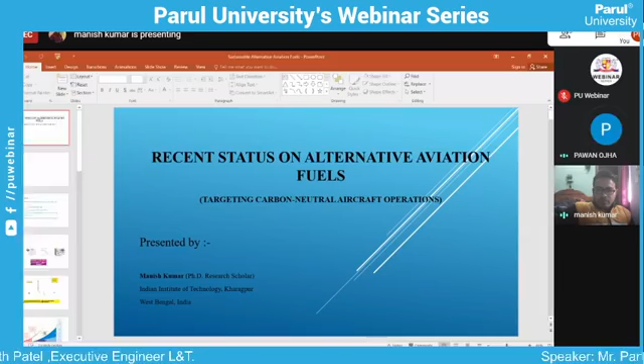He graduated in the year 2013 in Aeronautical Engineering from Hindustan Institute of Technology and Science. Then he pursued his master in Space Engineering and Rocketry from Birla Institute of Technology, Mesra. And after that, he worked as an assistant professor in the Department of Aeronautical Engineering, Priyadarshini College of Engineering, from 2015 to 17. And then later on, he joined as a junior research fellow in Department of Aerospace Engineering, IIT Kharagpur.

Then he worked as a junior research fellow for 1 year on the research topic combustion characteristics of alternative jet fuel. And then he got inducted into the PhD program in the year 2018, and now he is pursuing his PhD in the same domain. He has around 6 to 7 publications in his name, in international journals and conferences.

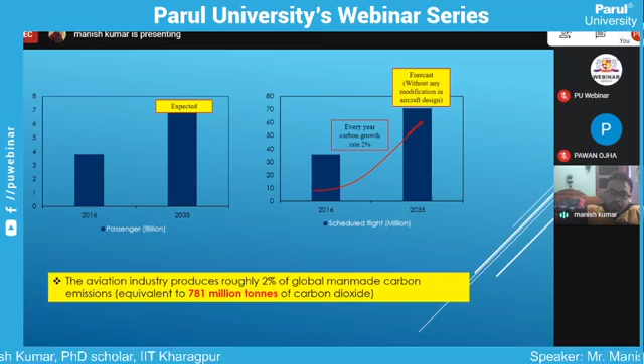Here you can see that every year the aviation industry almost contributes 781 million tons of carbon dioxide to the environment.

We now have this improved aerodynamical structure. Because of that, we have seen a lot of differences in emissions, and these differences are due to new kinds of technology.

So after that, by employing different potential alternative fuels, we can go to 0% carbon, meaning a carbon neutral kind of thing. For that, we have to think of new fuel or modify the existing fuel, and proceed in that way. So by 2050 we can reach carbon neutrality.

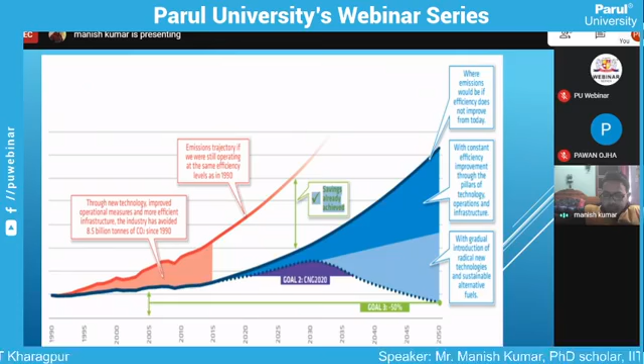Whenever any industry talks about alternative fuel, they generally come to biofuel. But biofuel is not 100% the solution, because in biofuel there are things like palm oil which will cause deforestation.

So it's not a good thing to directly say biofuel, because in many magazines, whenever we talk about alternative aviation fuel, biofuel comes into the picture. We should instead say sustainable alternative fuel — that term is better.

So whatever alternative fuel has potential and cannot destroy our environment, or can be sustainable and feasible for the present aviation industry and usable in our present aircraft, that's the terminology we should stick to.

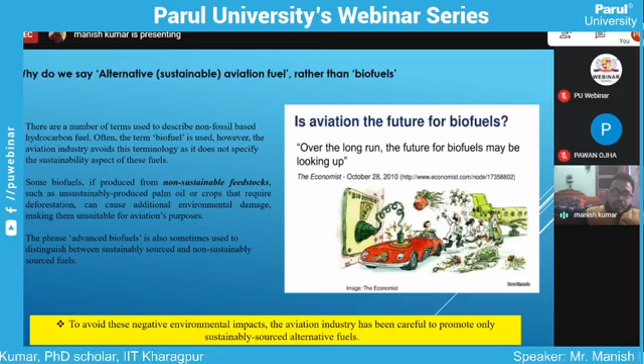Right now, the alternative fuels we prepare are the third generation of fuel, made by green algae, Jatropha — these are feedstocks of the biofuels. Also solid waste can be used, along with Jatropha, camelina, yeast, and salicornia.

Nowadays used cooking oil has also come into the picture. We can go for biodiesel kind of things, which can be extracted as biodiesel and used in the aviation industry.

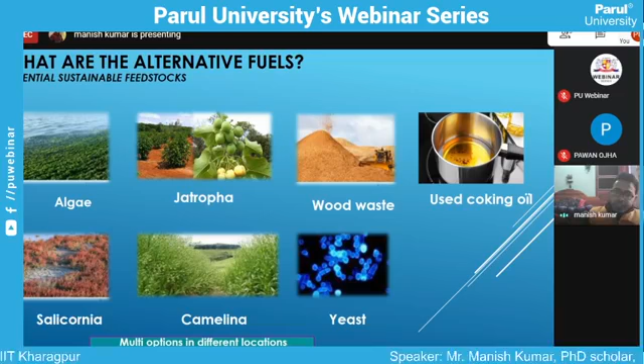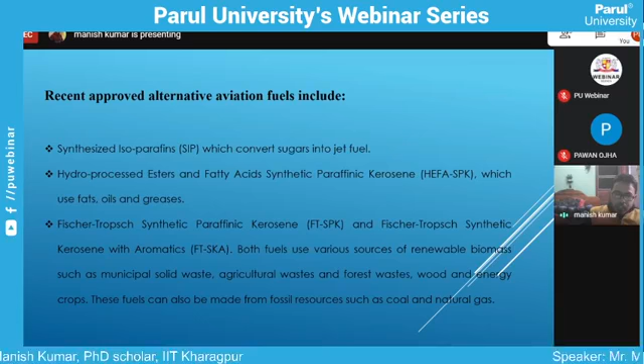Nowadays, recent approved alternative fuels are widely used in many countries, like synthesized isoparaffin, hydroprocessed ester and fatty acid synthetic paraffin, called HEFA SPK, and FT SPK, which is Fischer-Tropsch synthetic paraffin kerosene. These fuels are globally used and certified.

Generally, from the feedstock we use, we take this feedstock to the industry and process it. These processors allow us to process it and use it as an alternative fuel.

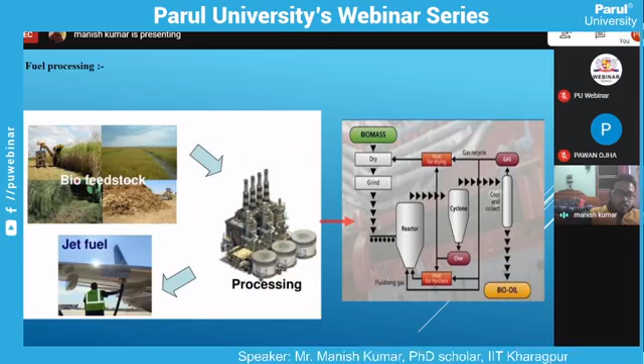So the thing is, we are not impacting the environment. Second, no country needs to depend on any other country. They can do their own agreements, grow these feedstocks on their own land, and get proper alternative fuel to use. This way, the country will not depend on other countries. These are the benefits of alternative fuel.

There are some key advantages, as we discussed - environmental benefits. In most of the biofuels we have tested, we have seen around 80% reduction in CO2 emission. Even some biofuels we tested in our lab found quite better results, which we will discuss later. There's also diversification of supply and economic growth.

If we move to alternative fuel, this will create new job opportunities, and the country will get extra economic sources, which will enhance the GDP of the country.

Actually, achieving this is not very easy or simple. It requires many collaborations - industry point of view, country point of view, country policy point of view, political point of view. Only then can we achieve such a target.

It is expected that there will be annual improvement of nearly 1.5% by 2020, reducing CO2 emissions. By 2050, as discussed earlier, most countries have taken a target to go carbon neutral.

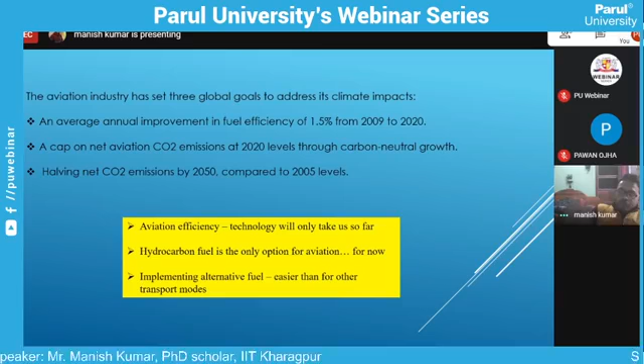Whatever fuel we can extract from any feedstock, without testing we cannot employ it. Certain testing and certification is required. Only then can that particular fuel be globally accepted for the aviation industry. There are different testing parameters and levels - laboratory testing, ground testing, and air testing. After all the testing, the biofuel can become globally applicable for the aviation industry.

Initially comes laboratory testing. For any new fuel, characterization of the fuel property is very essential - characterization of fuel property, combustion characteristics, atomization characteristics. These things are very essential, so we will go into details of what all needs to be done regarding the characterization of these properties.

The characterization of fuel property requires looking at the lower heating value (LHV), which should be close to present Jet-A1, viscosity, and surface tension, because these properties should be near those of present fossil fuels, so that we can proceed to further testing.

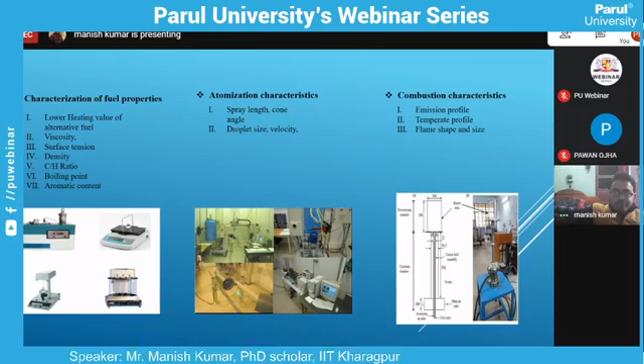After that, we can go for ground testing. In a particular separate engine, we do several kinds of tests like emissions, temperature, exhaust gas temperature, and SFC and so on.

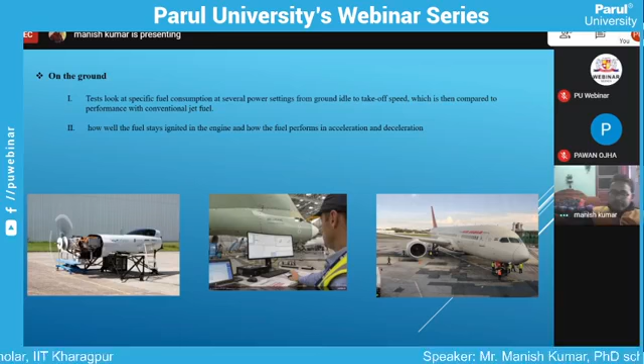After that, we go for testing where generally one or two engines are run totally on biofuel or biofuel blend, and we see how that engine performs during landing, cruise, and full air condition, whatever the worst condition we can achieve.

All these conditions are tested for that particular fuel in flight, so that after full confirmation from all this testing, it can be widely and globally accepted as an alternative aviation fuel.

So that process is quite long, but still many industries nowadays have taken interest, like Airbus, Safran Aerospace, Boeing, Qatar Airways. In India too, recently SpiceJet has tested biofuel.

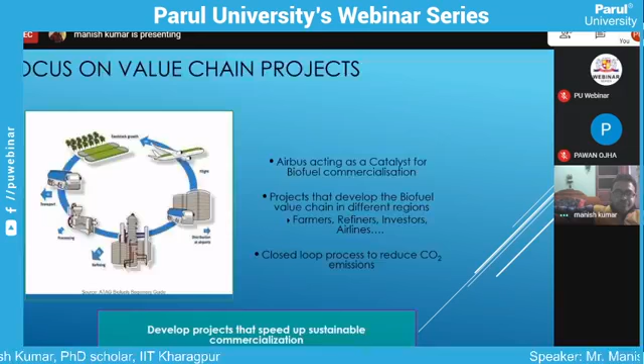For employing any fuel, the process is going very slow. So to speed up these things, most of the aviation industry has to collaborate themselves. Aviation has a limited solution, and biofuel can be one of the answers for that. For that, a country's decision and policies come into the picture, and everyone has to collaborate with each other. Only then is such a target achievable.